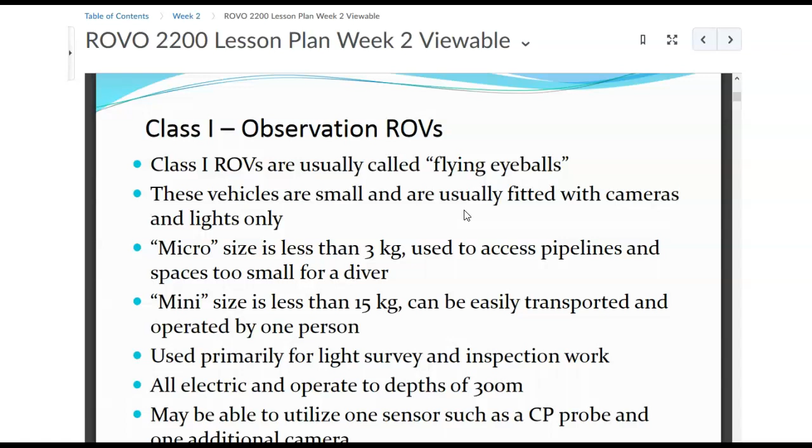Used primarily for light survey and inspection work. All electric and operate to depths of 300 meters. May be able to utilize one sensor such as a CP probe and one additional camera. So cathodic protection, and that's got to do with rust and all that. We'll get into that later on in another course, but feel free to look up cathodic protection.

Okay, and they cost anywhere from 10 to 100. So this is a bit outdated. You can get them now from about $2,000, with Blue ROV and Deep Trekker. So remember those two companies. They're not on the slides.

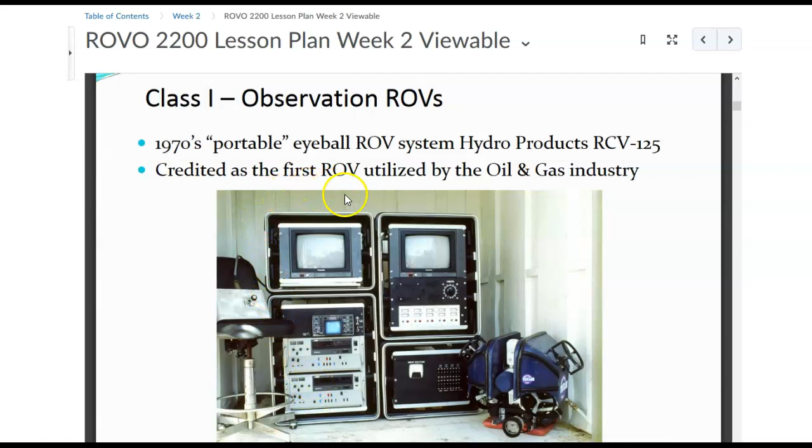So 1970s portable eyeball ROV system, Hydro Products RCV 125 we saw last week. So that's what it looked like. CRT, cathode ray tube television screens, so they're just as deep or deeper than they are wide. Okay. Credited as the first ROV utilized by the oil and gas industry. So there it is again, underneath a drilling platform.

And we'll just get into the naming conventions. ROVs that are manufactured following a standardized design are commonly named by a brand name followed by a number indicating the order of manufacture. Examples would be Millennium 29 or Scorpio 17. Design of a series of ROVs may have changed significantly over the life of an ROV series. However, an ROV pilot will often be familiar with the idiosyncrasies of a particular vehicle by name.

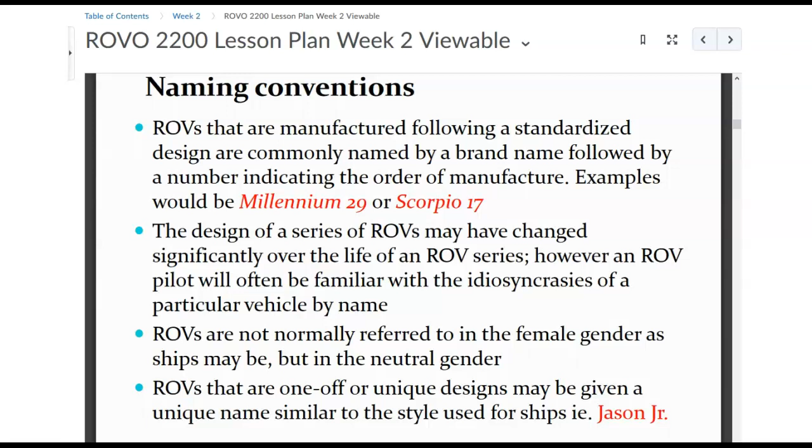So like Mil 29 was different than Mil 3, okay? There were some differences, but they were still Millenniums, basically the same. Mag 25 was different than Mag 33. ROVs are not normally referred to in the female gender as ships may be, but in the neutral gender. ROVs that are one-off or unique designs may be given a unique name similar to the style used for ships, i.e. Jason Jr.

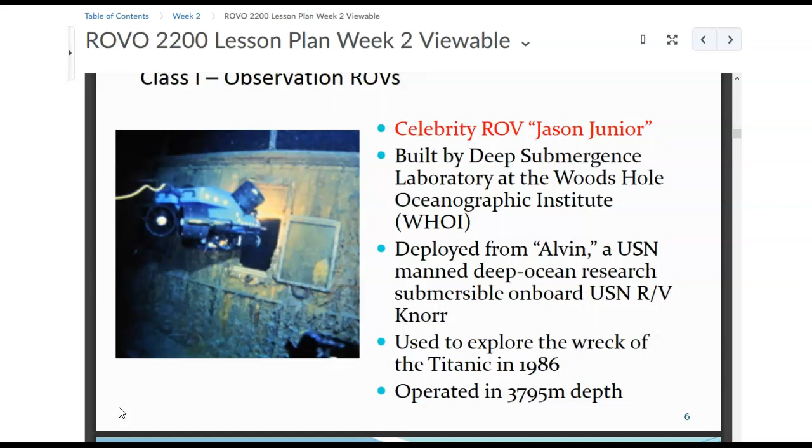Celebrity ROV Jason Jr., built by the Deep Submergence Laboratory at the Woods Hole Oceanographic Institution, WHOI. Deployed from Alvin, a United States Navy manned deep ocean research submersible, on board a United States Navy registered vessel. Used to explore the wreck of the Titanic in 1986 and went down to almost 4 kilometers. Alright, so there are parts of the Titanic, okay?

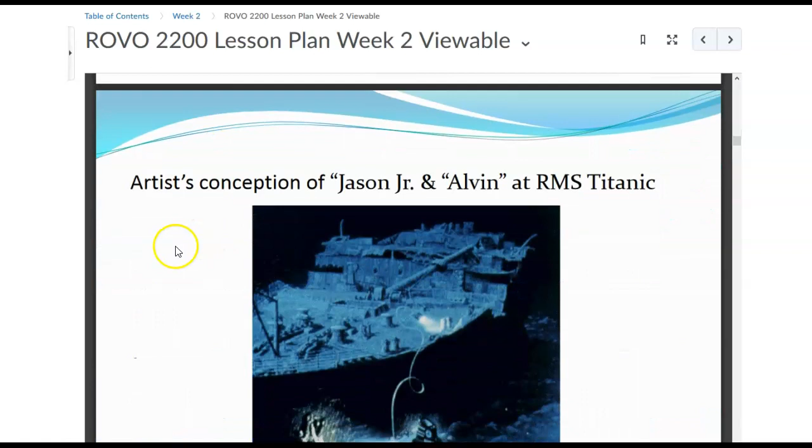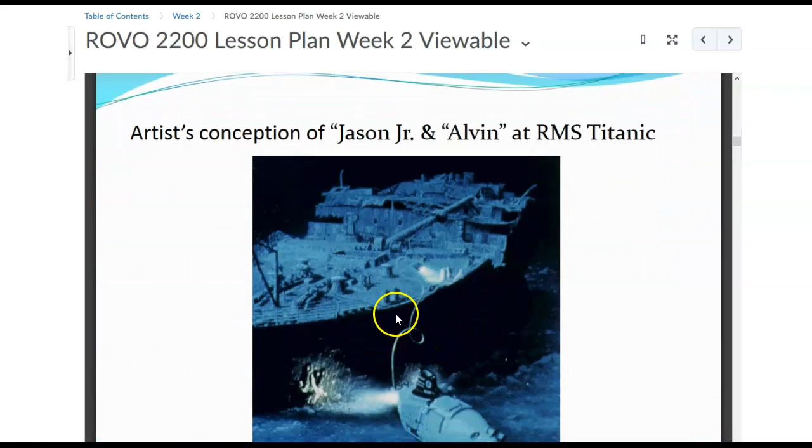And that's an artist's conception. Alright, so you'll see this is the sub and then the Jason Jr. flies out. I think it hit at 30 something miles an hour when it hit the ocean floor. Just to let you know.

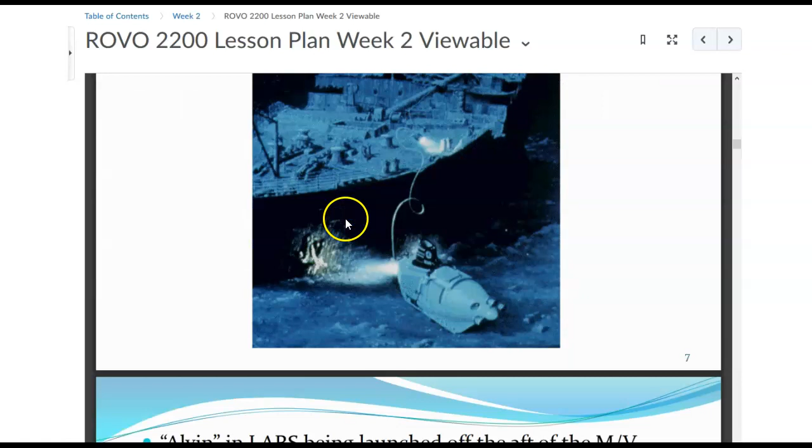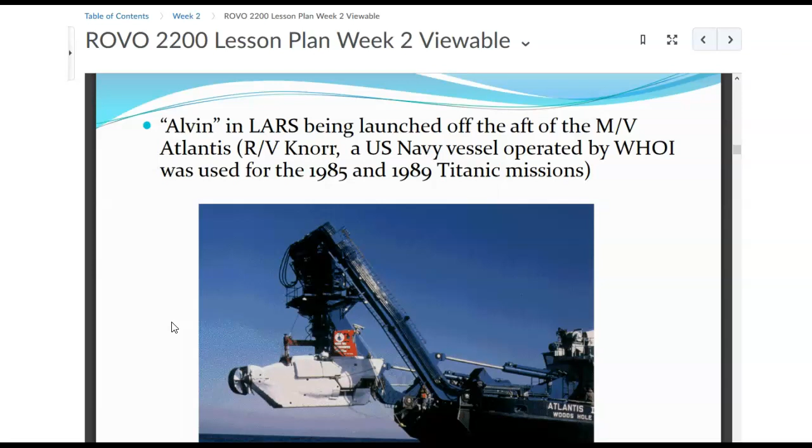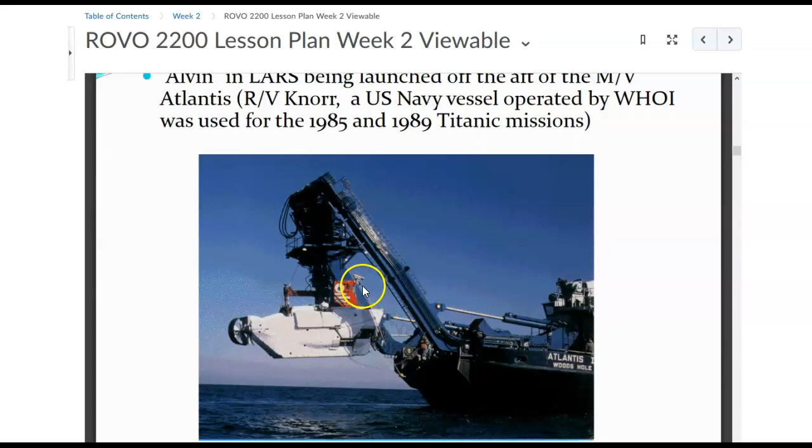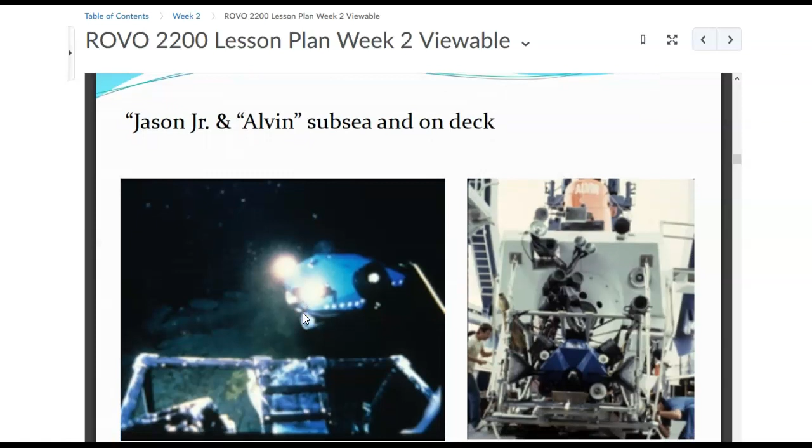Alvin in the LARS being launched off the aft of the marine vessel Atlantis. A United States Navy vessel operated by the WHOI was used for the 1985 and 89 Titanic missions. So once again, there's the LARS, okay, with your giant boom actuators. This swings it in on deck and off, right? Then you release the latches and down it goes. Jason Jr. and Alvin, subsea and on deck.

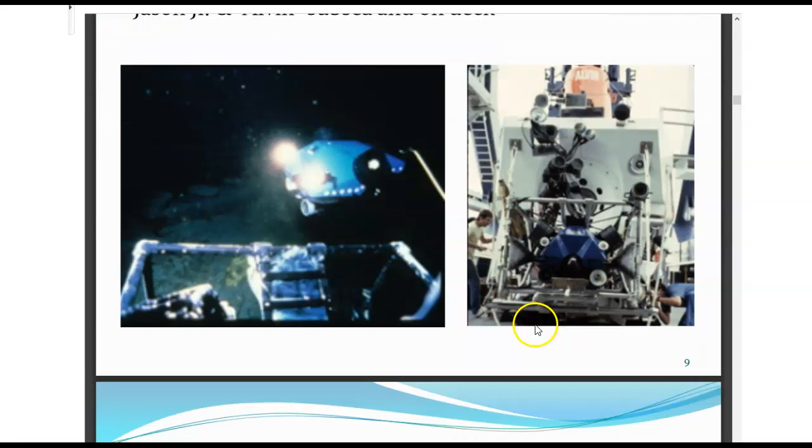Alright, so Class 1 observation ROVs perform simple observation tasks such as monitoring divers and taking video, and perform simple visual survey tasks. Low cost ROV, Quest, low cost LC ROV. Okay. Little manipulator here, right? Lights, camera.

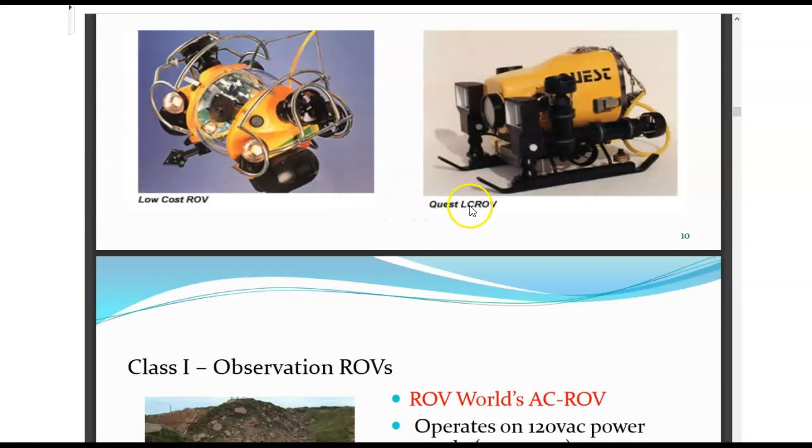ROV World's AC ROV operates on 120 VAC power, 300 watts, 75 meter depth rating, portable, can be deployed by one person in under 3 minutes. Fly-through size of 7.48 inches, and a drop-through size of 8.27 inches, 3 kilograms, 20,000.

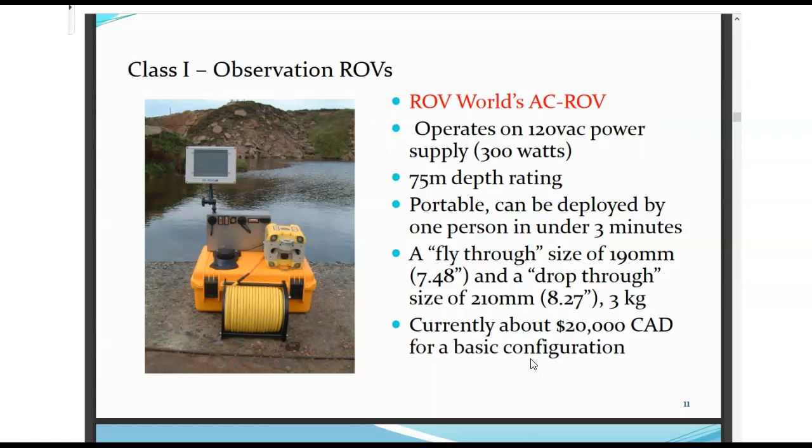Frequently used in conjunction with divers for inspection work. Mainly used for safety purposes to monitor diver location and condition. Gives the surface supervisor an overall view of the subsea work site.

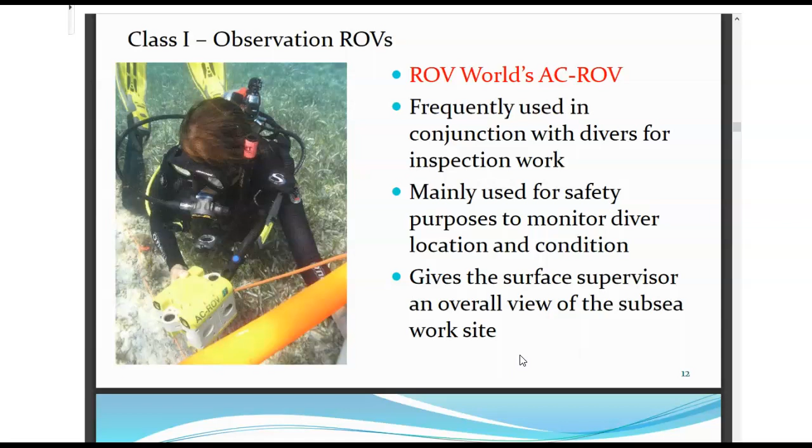VideoRay. We did have one of them. We still got the body of it, and the thrusters work. Manipulator, we got 2 or 3 of them. It's been broken up over the years. It was one of the first ROVs, right? We got a newer VideoRay. It doesn't look like this at all. You can go on the VideoRay website. Shark is another website.

SeaBotix. Deep Trekker is really good. We use a lot of Deep Trekkers. We have 4. And the Deep Trekkers, they got a newer one out with a vertical controller like these ones here. The other models of the Deep Trekker do not use vertical, so it can't go up and down. It can go up and down by changing the ballast.

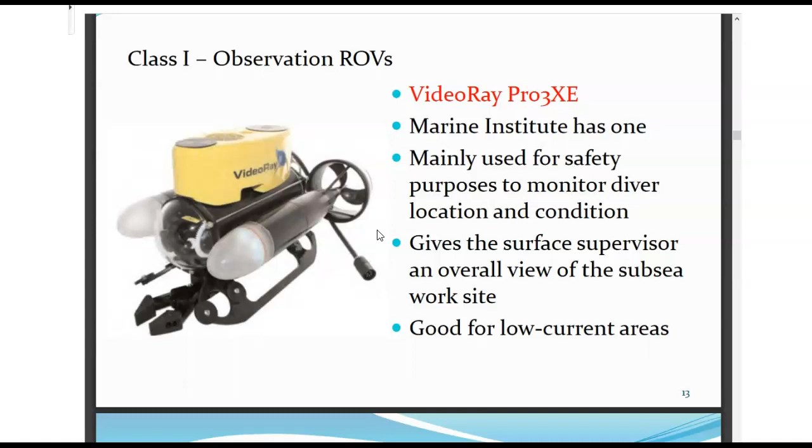Alright, so this here is mainly used for safety purposes to monitor diver location and condition. Gives the surface supervisor an overall view of the subsea work site. Good for low current areas. So SeaBotix, this is the LBV300. We have one of these. Basically, it's down at SeaBotix right now, maybe getting refurbished. Big Green was my pet name on it.

Excellent ROV. There's also an LBV 150. I do believe another division of the Marine Institute has one of them. SeaBotix are used a nice bit. There's a construction company here in Newfoundland that uses them for building wharfs, the inspection of the wharfs and all that. Their main competitor, to me, would probably be Outland. Outland makes an outstanding ROV around the same size.

Okay. 300 meter seawater depth rating, fiber optic or copper conductor video transmission. So the one that the other division got at the Marine Institute has fiber optic. Ours is copper. And the flaw with that was when it came into the rear end, into the connectors, it went wide off, and the fiber optic is only like the size of a human hair, even though it was armored and all that. So you had a Y configuration, which could catch debris, seaweed, sticks, you name it, and then rip it apart. So one dedicated tether is better.

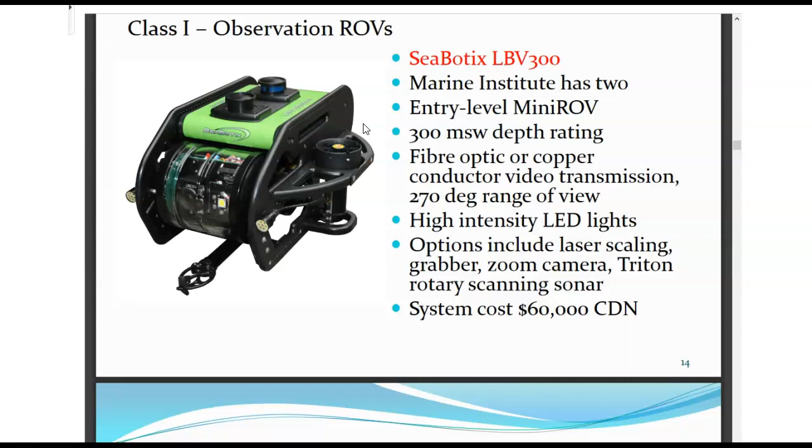All right. So actually, with SeaBotix, their copper, I'm going to say, was better than fiber optic / copper. High intensity LED lights. Options include laser scaling, grabber, zoom camera, Triton rotary scanning sonar. So they cost about 60,000. Same with the Outlanders. The manipulators themselves are anywhere from 4 to 8 grand.

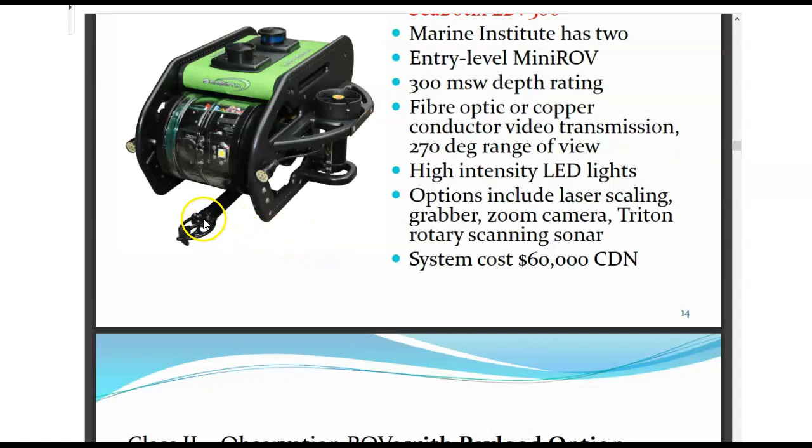Class 2 payloads. Usually have 2 simultaneous view cameras and are capable of handling several sensors. They are capable of carrying additional payloads associated with multiple cameras, sensors, and manipulators without a loss of original function. Can be fitted with sonar and can perform more detailed survey tasks. Can be fitted with light tooling packages such as rope and wire cutters. Higher cost and less portable, usually less than 20 horsepower.

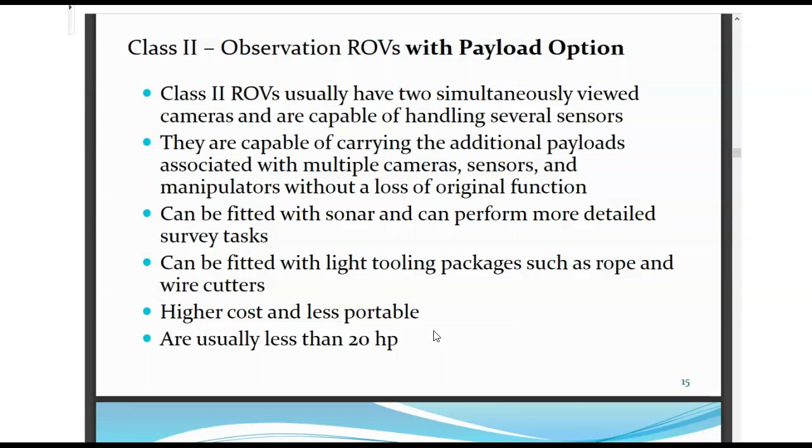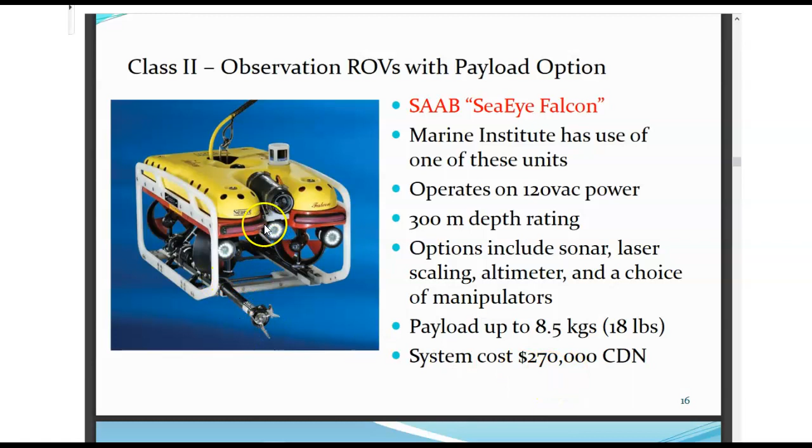So Saab SeaEye Falcon, Saab as in Saab from Sweden, makes the cars and the fighter jets. Marine Institute has use of one of these units; MUN actually owns it. Operates on 120 VAC power, 300 meter depth rating, so 1,000 feet, right? Options include sonar, laser scaling, altimeter, and choice of manipulators. Payload up to 18 pounds, not a heavy payload. The system costs 270,000 Canadian, so very expensive, but a really good sub. I will say I did fly it, really good. Never seen this one before.

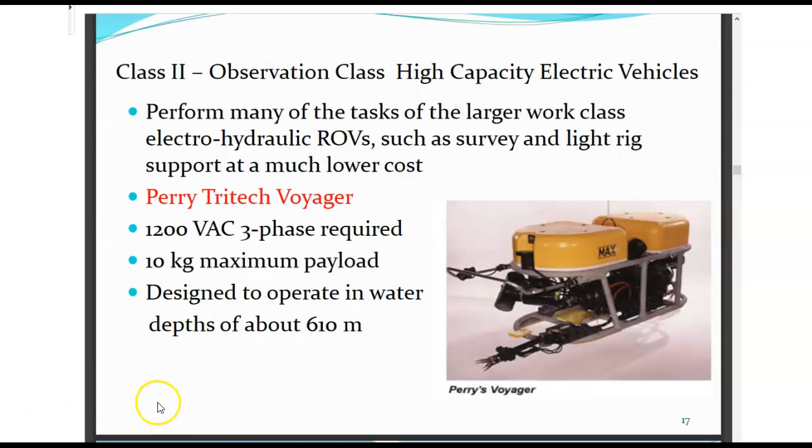Observation class high capacity electric vehicles perform many of the tasks of the larger work class electro-hydraulic ROVs, such as survey and light rig support, at a much lower cost. Perry Tritech Voyager, 1200 VAC 3-phase required, so alternating current, 3-phase. 10 kilogram maximum payload, designed to operate in water depths of about 610 meters. So very capable inspection vehicles that have also gained popularity with the military and science markets. The work scope requirements for military and scientists are not in most cases as complex as oil and gas operations.

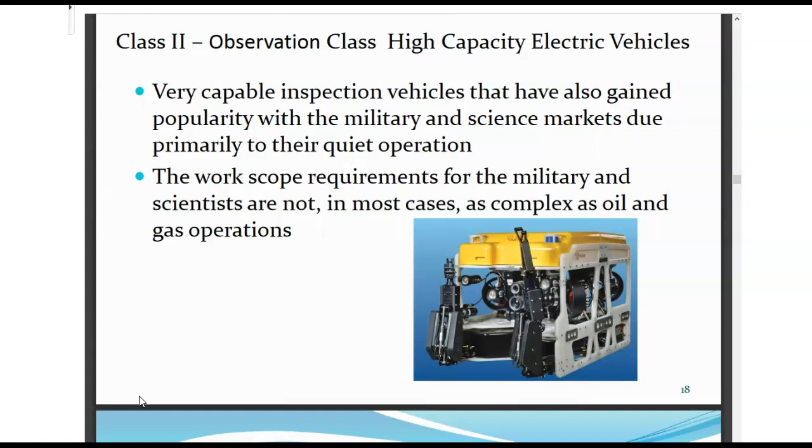So Saab makes a couple of these. Soil Machine Dynamics, SMD, is another one. I guess it's the English equivalent of FMC, Food Machinery Corporation. Work class ROV systems, including vans, LARS, and winch, vary in price from 500 grand to well over 15 million. So I've seen both, okay?

The new Schilling has an ROV, UHD is the name. I think it was $15 million. It's on the Skandi Vinland. It's down there in the harbour by DOF, D-O-F.

There are fewer work-class ROV manufacturing companies than Class 1 and 2 companies. Difficult to know how many companies there are in total due to fluctuating ownership, dissolutions, and niche market constructor/operator companies. So there was ProDive Oceaneering. Now there's ProDive and Oceaneering Canada, owned by Oceaneering from down in the States, worldwide. Dominion Diving's in Nova Scotia. There's Subsea 7, which took over Acergy. Technip is another one, from France. Edison Chouest down in the States. Canyon Diving's a big one. Okay, there's one in Malaysia.

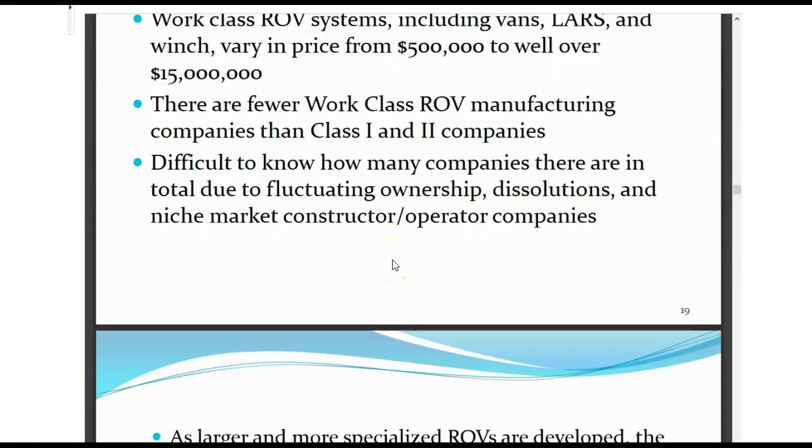It'll come to me. It will come to me. Actually, it's from Italy, the company that owns it, but they got a big contract in Malaysia and Singapore.

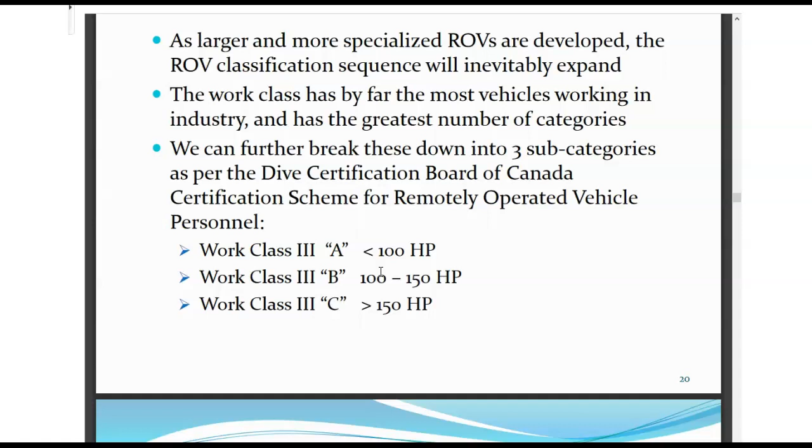So as larger, more specialized ROVs are developed, the ROV classification sequence will inevitably expand. The work class has by far the most vehicles working in the industry and has the greatest number of categories. So we can break these into three subcategories as per the Dive Certification Board of Canada. So less than 100 horsepower is Class 3A, Class 3B is 100 to 150 horsepower, and Class 3C is 150 horsepower up.

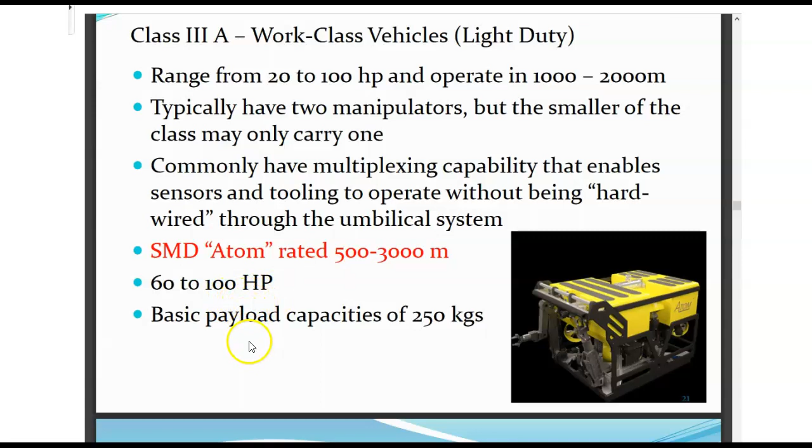Class 3A, so 20 to 100 horsepower, operate 1,000 to 2,000 meters, so 1 to 2 kilometers. Typically have 2 manipulators, but the smaller class may only carry 1. Commonly have multiplexing capability that enables sensors and tooling to operate without being hardwired through the umbilical system. Soil Machine Dynamics, Atom, rated 500 to 3,000 meters, 60 to 100 horsepower, basic payload capacity of 250 kilograms. So a good bit of lift. And that's just an advertisement from the company.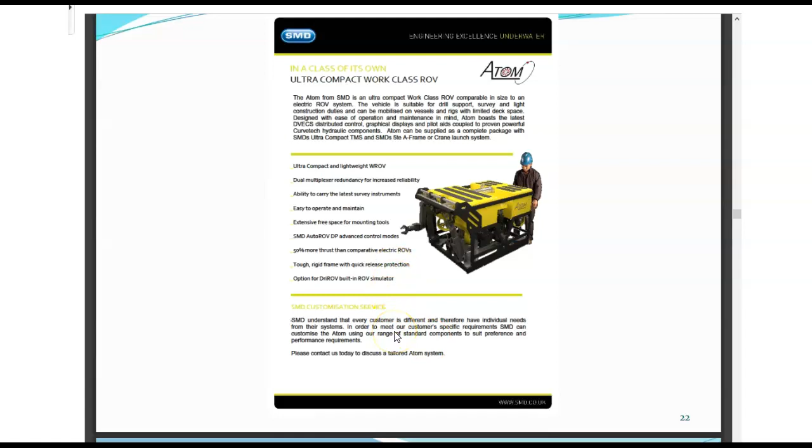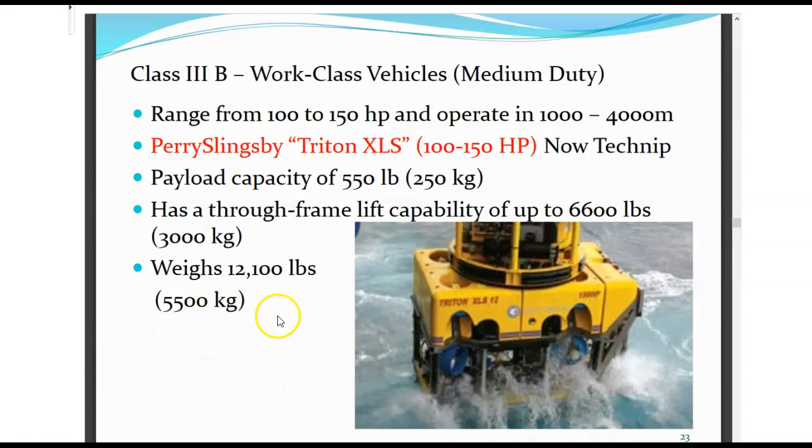So ours is 150 horsepower. This is 100 to 150 horsepower and operates in 1,000 to 4,000 meters, 1 to 4 kilometers. Can lift up to 550 pounds. Through frame lift capability up to 6,600 pounds, weighs 5,500 kilograms, okay? So, nothing light. That's another advertisement.

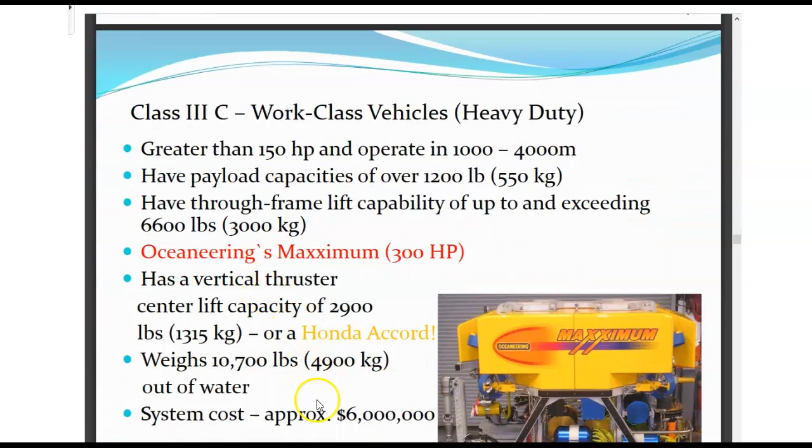So, Oceaneering Maxximum. So I've worked on Millenniums, Millennium Pluses, Magnum Pluses. They're Oceaneering vehicles, so I've never seen this. This is probably encased around, or it could not be, but the main thing is everything is inside the frame, alright? And that's like a fiber optic can, a telemetry can there, that's where your computers are mostly at.

Right, the compensators are here, Firestone bellows, you can see, manipulators, cameras, thrusters, the gold motors are here, okay, looks like there's 2. Termination box, this square one, alright, strain relief. So this came out of a cage because it would have backed in. So the tether is here.

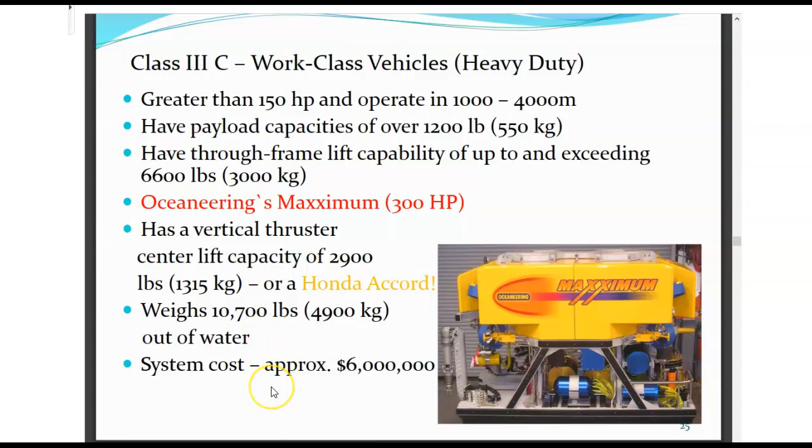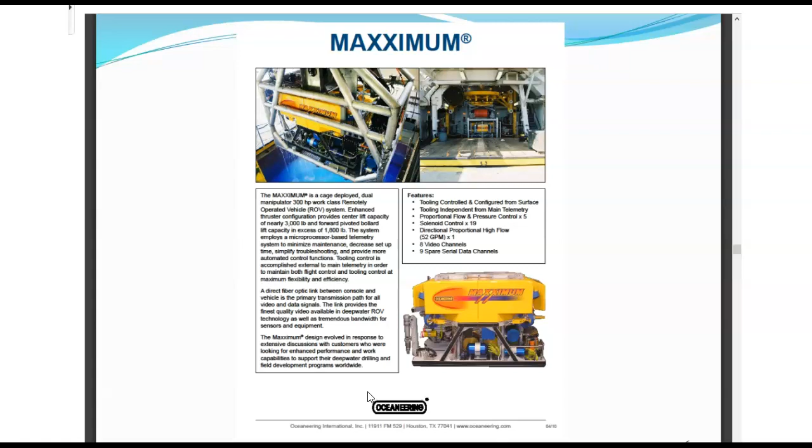Alright, so greater than 150 horsepower and operates up to 1 to 4 kilometers. Can lift over 1,200 pounds, with the capability of exceeding 6,600 pounds. This one here is 300 horsepower, has a vertical thruster, center lift capacity of 2,900 pounds, or a Honda Accord. This weighs over 5 tons, and the system costs $6 million, okay? So once again, there's a data sheet on it.

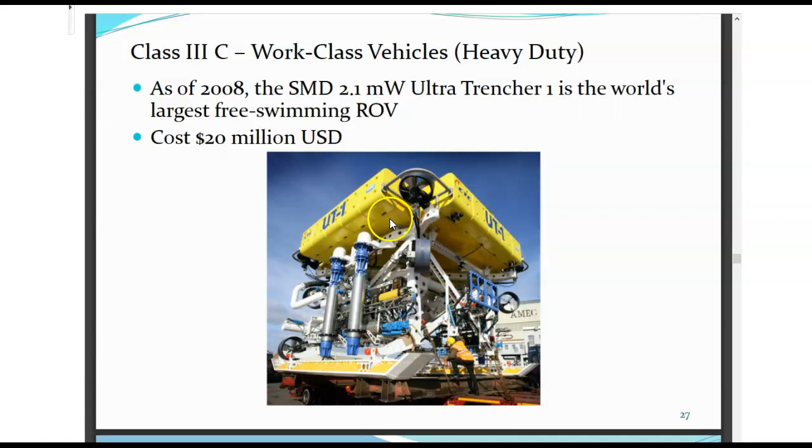So the SMD, Soil Machine Dynamics, 2.1 megawatts, Ultra Trencher 1 is the world's largest free swimming ROV, 20 million US dollars. So you can see the technician, so how big it is. So trenchers inject high pressure water on either side of the pipe, which fluidizes the soil bearing the pipeline. 50 tons, size of a small house, designed to operate down to a depth of 1,500 meters and bury large diameter oil and gas pipelines.

Alright, so we'll just stay here for a second. We'll pause. So here's a little video of a trencher. I'm not going to show it all, but you'll get the gist of it in a second.

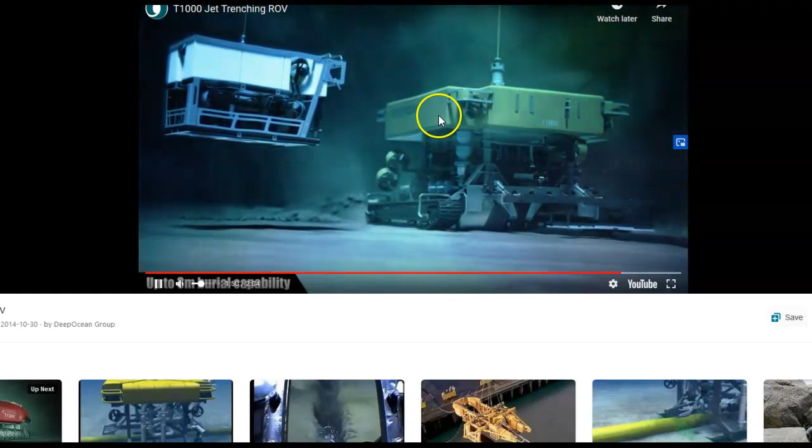As you can see, a regular ROV next to the trencher, making sure everything is going right. This is what you call the God's view, so with the camera on that, you'd actually see this ROV like that, and if there was another ROV looking at the two vehicles, you'd see this scene right here, up on deck. So there you go. Alright.

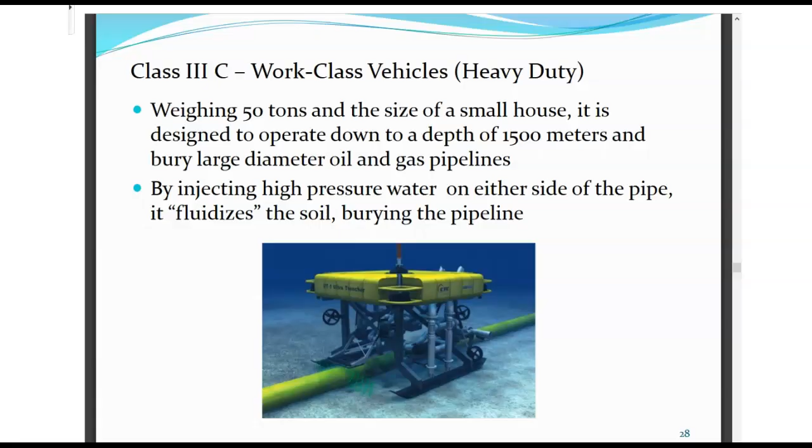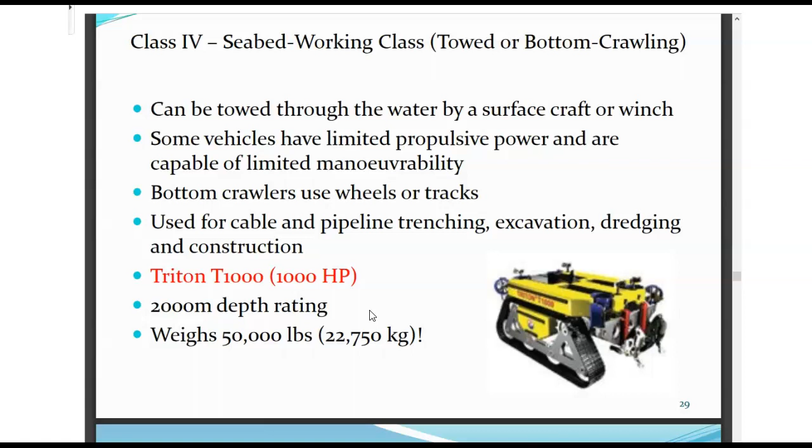So these can be towed through the water by a surface craft or winch. Some vehicles have limited propulsive power and are capable of limited maneuverability. Bottom crawlers that use wheels or tracks. Used for cable and pipeline trenching, excavation, dredging, construction. T1000, 1,000 horsepower, 2 kilometers depth rating, weighs 50,000 pounds.

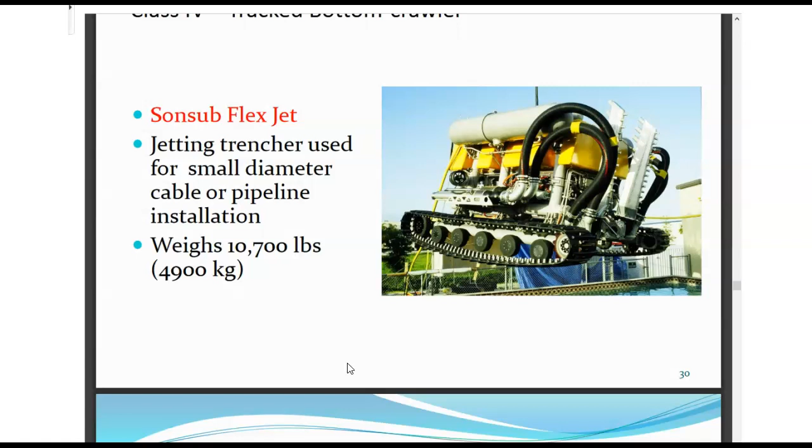Saipem was the company, I'm sorry, from Italy, okay. Big contracts in Asia. Jetting trencher used for small diameter cable or pipeline installation. This weighs 4,900 kilograms. So here, this one here, class 4, tracked bottom crawler again. As you can see, the two people.

2.4 megawatt, 3,220 horsepower. SMD, Soil Machine Dynamics. Rock trencher is currently the world's most powerful seabed tractor, and it still is. The support system for this ROV is massive. You need a $500,000 generator for power. Okay, so with this and the subsea mining, just think of excavators and all that, it's all remote controlled, alright, same size of equipment.

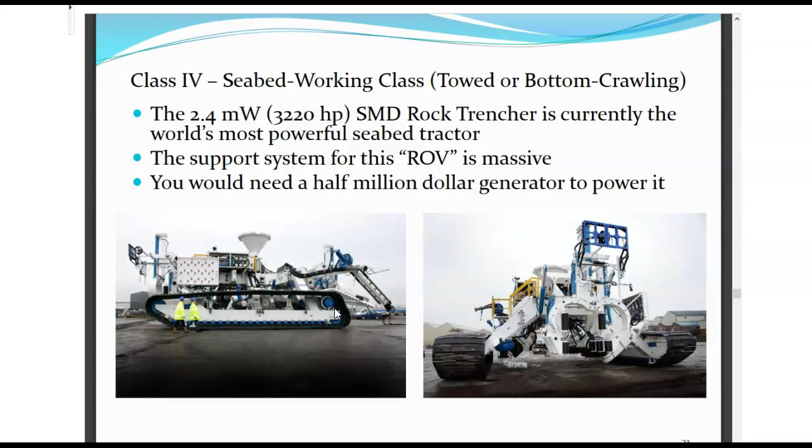Now we've got the AUVs. Most ROVs in this class are classified as AUVs, autonomous underwater vehicles. Autonomous underwater vehicles, AUVs, represent the next step in the evolution of underwater intervention. Three main industries utilize AUVs: oil and gas, scientific research, and the military. AUV applications range from seabed surveying to ocean research and mine countermeasures work.

The oil and gas industry currently utilizes AUVs for making detailed maps of the seafloor before they start building subsea infrastructure. Pipelines and subsea completions can be installed in the most cost-effective manner with minimum disruption to the environment. Also, post-lay pipe surveys are now possible.

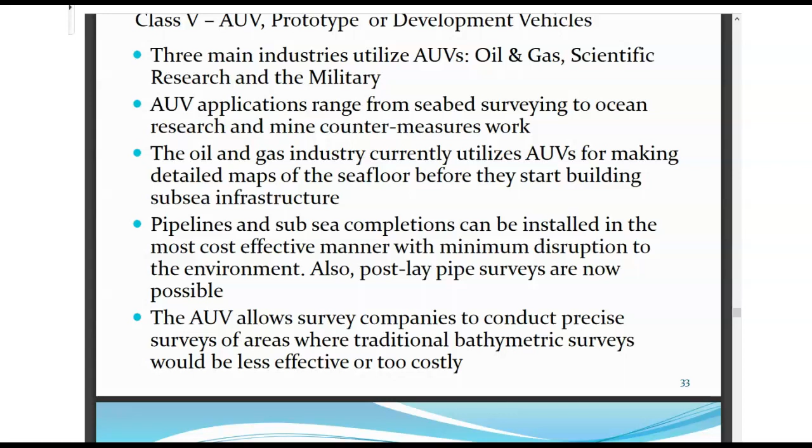The AUV allows survey companies to conduct precise surveys of areas where traditional bathymetric surveys would be less effective or too costly. So I'll just get a little blurb up on AUVs for you. Bear with me. So this is from Fugro, another company that's got ROVs too. So I'll just show you the sonar image.

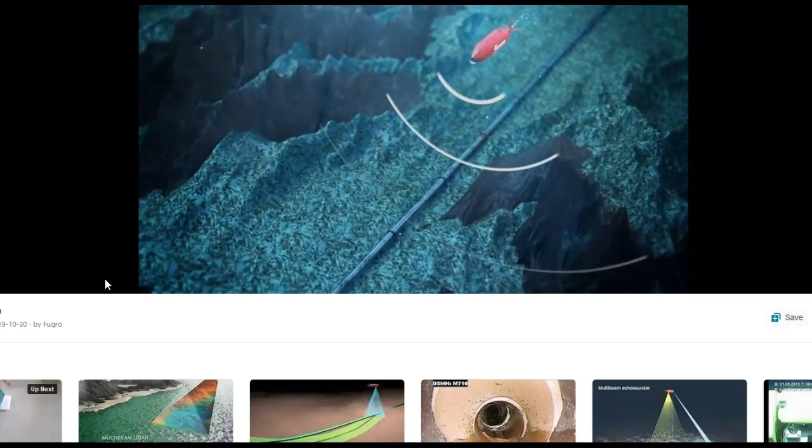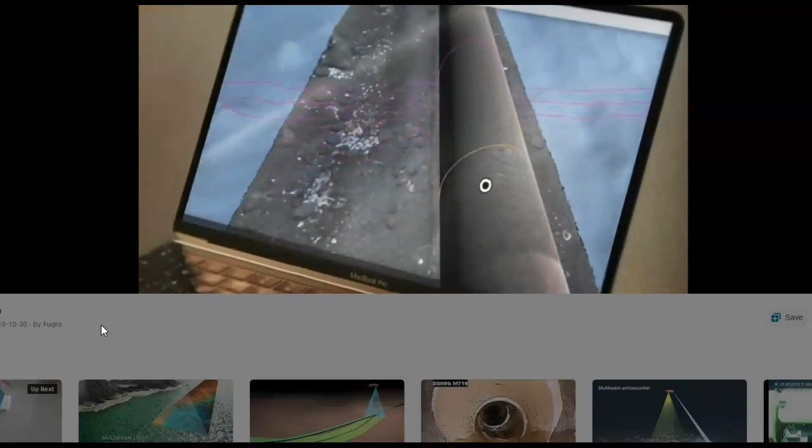Fugro, a world leader in subsea inspection services, has created an innovative pipeline inspection solution, providing quick, efficient and cost-effective information on pipeline assets. Using our fleet of autonomous underwater vehicles, or AUVs, we optimize data collection and delivery, enabling asset insights within hours. Pipeline information is delivered remotely via a web-based environment in the form of a digital twin. This photorealistic 3D model provides detailed intelligence on the pipeline's condition and an overview of any anomalies. The automated workflow makes the data processing up to 80% more efficient, allowing faster access to critical information. Fugro's solution allows remote data access to our specialists, reducing HSSE exposure.

So as you can see, some AUVs are fairly big.

Personnel needed offshore. AUVs can be mobilized from a container on a vessel of opportunity, increasing flexibility and reducing operational costs, enabling our clients to make timely asset management decisions. Fugro, unlocking insights from geodata.

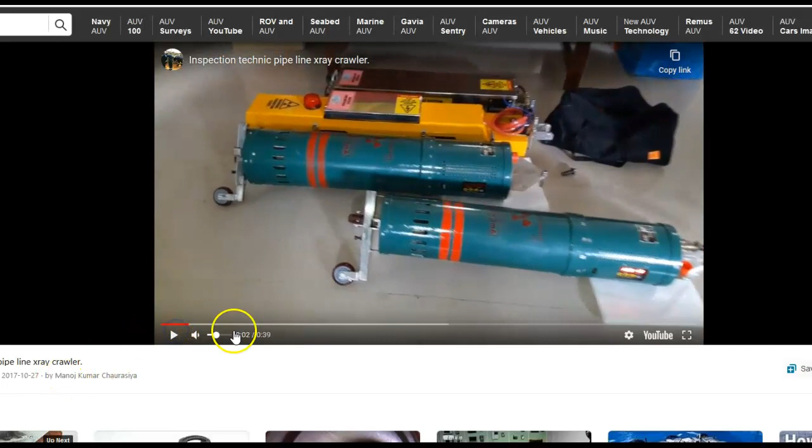Alright, so that's enough. We'll show you Aquanaut. This is a hybrid. We'll get into hybrids later.

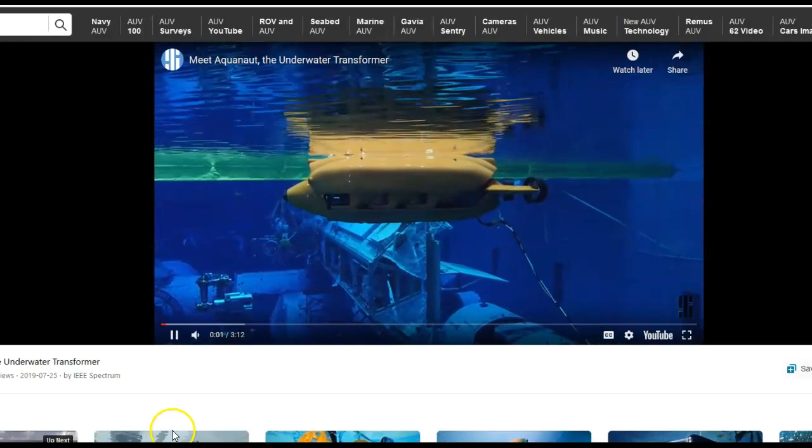We came up with this concept from the get-go to build a transforming vehicle so that we could be hydrodynamic and be able to cruise a long distance. And then so just remember that, Aquanaut, the underwater transformer.

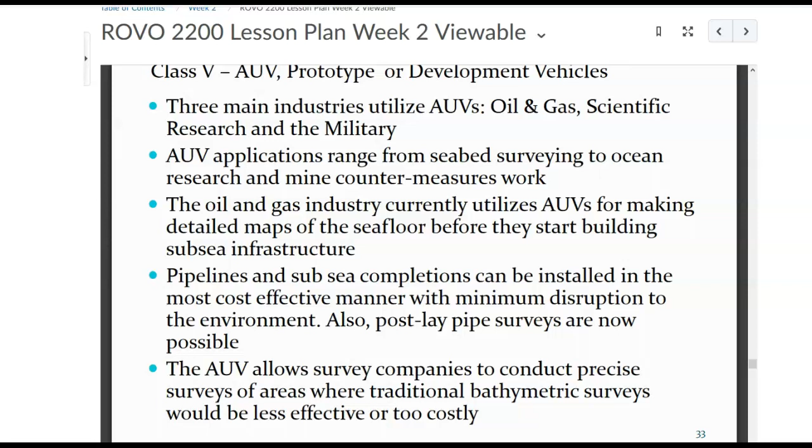Okay. And we'll stop that. That's all. You can look at that yourselves. And back to the lesson plan. So the AUV flies, right? Scanning here, scanning here.

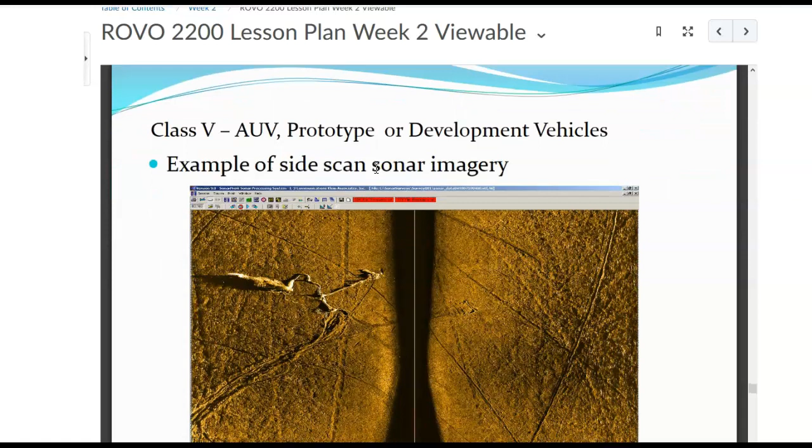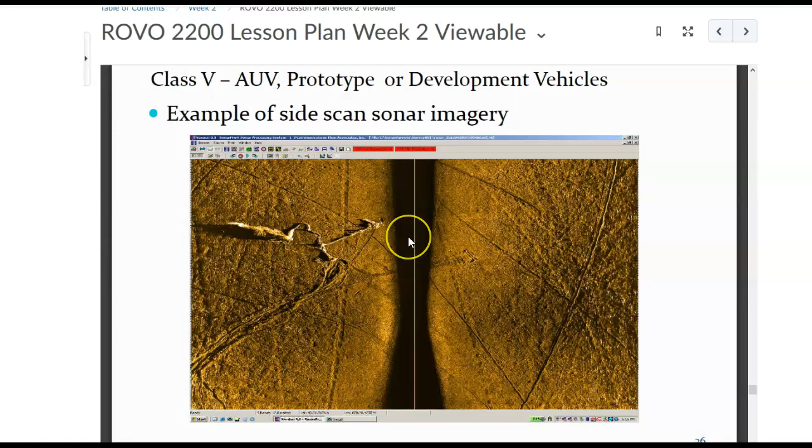What I'll just say about this computer software is it was the same I was using 10, 12 years ago with Baker Hughes. Alright? But that's for the ocean mappers to interpret. But obviously it's the seabed floor, right? And this blank space is right underneath the ROV, the side scan sonar image. So there is a blank space.

Right. AUVs are primarily oceanographic tools. They carry various sensors that enable them to navigate autonomously and map features of the ocean. Typical sensors include compasses, depth sensors, side scan, other sonars, magnetometers, thermistors, Doppler velocity sonar, and conductivity probes. Most AUVs in use today are powered by rechargeable batteries, along with a sophisticated battery management system, ultra capacitors, right? So we got all this now to go through. So we'll get back to that.

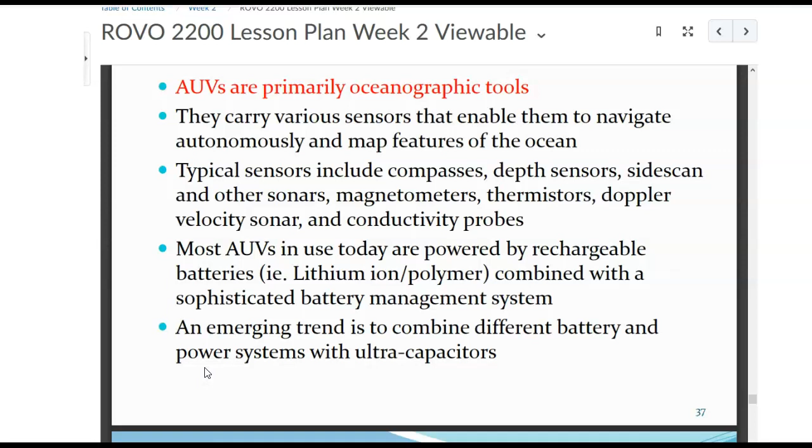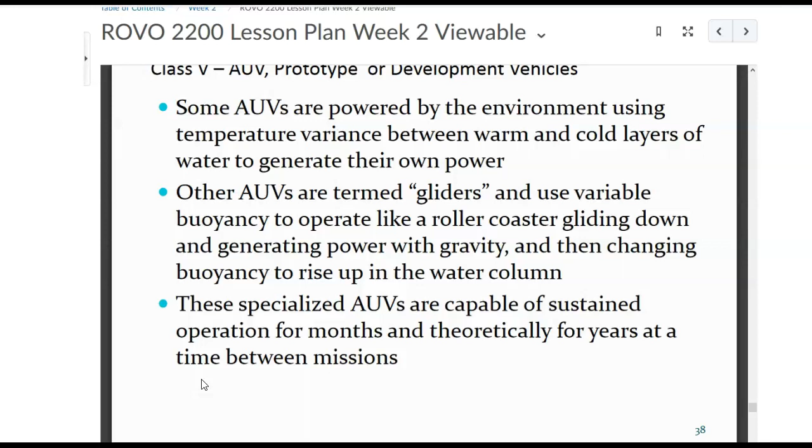Some AUVs are powered by the environment, using temperature variance between warm and cold layers of water to generate their own power. Other AUVs are termed gliders and use variable buoyancy that operate like a roller coaster, gliding down and generating power with gravity, then changing buoyancy to rise up in the water column. So just think of an AC sine wave, anyone with an electrical background. These specialized AUVs are capable of sustained operation for months and theoretically for years at a time between missions.

So, everyone knows what a compass is. Depth sensor, just a transducer, right? The pressure squeezes, producing the voltage. The higher voltage, the more depth, I do believe, from what I can remember. Side scan, other sonars, you've seen just a bit of that. That's for another course and other instructors, including myself. Magnetometers, magnets, right?

Compasses and thermistors, for temperature sensors and all that. Doppler velocity sonar, conductivity probes. It's for electrolysis, cathodic protection and all that. Doppler velocity logs, DVL, a sonar system that measures motion underwater. It emits sound bursts along beams angled downward in various directions. Echoes that are scattered off the seabed are returned. Okay.

So an ultracapacitor is a supercapacitor. It's an electrical component capable of holding hundreds of times more electrical charge quantity than a standard capacitor. So use will require very little current and low voltage.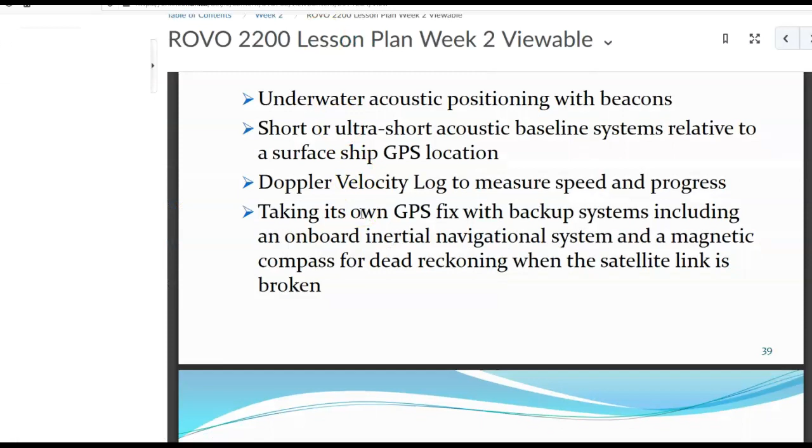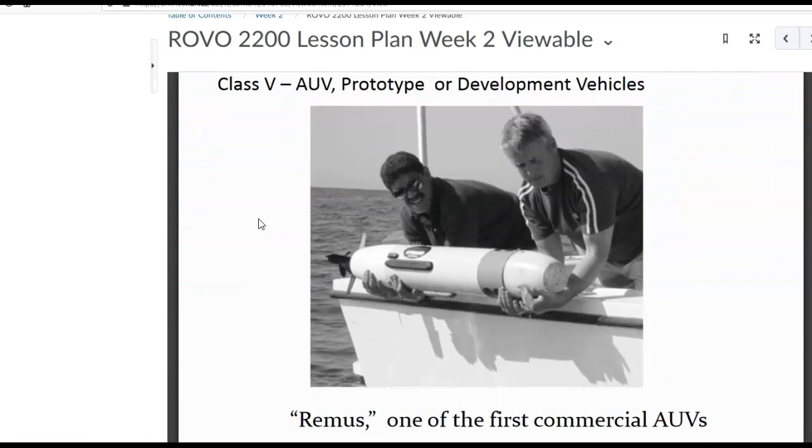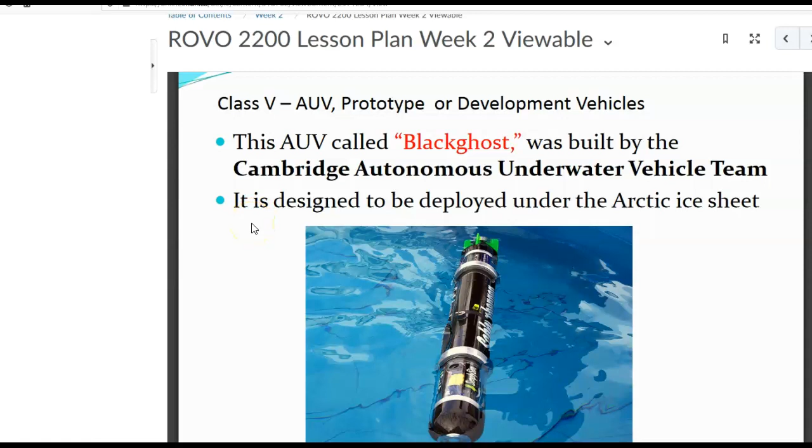The hybrid ROV Nereus will transform from a free-swimming vehicle for wide area ocean surveys to a vehicle tethered by a cable to a surface ship for close-up investigation and sampling of seafloor rocks and organisms. Nereus was developed by the Woods Hole Oceanographic Institution.

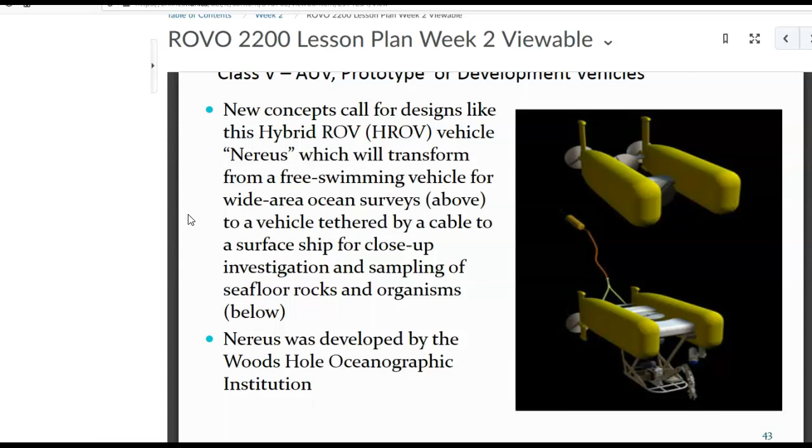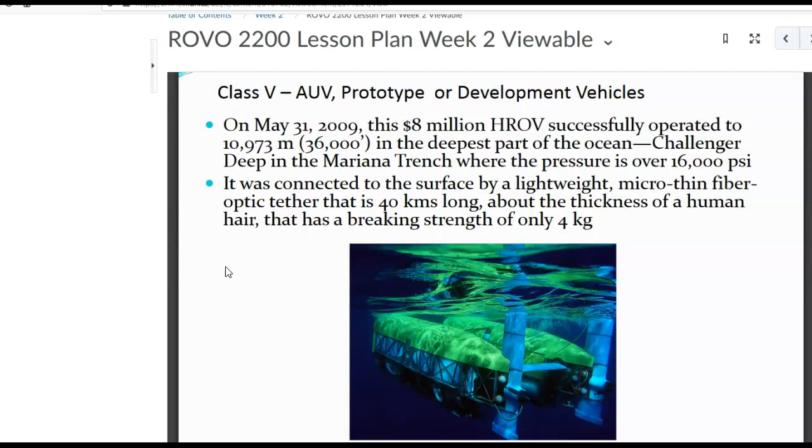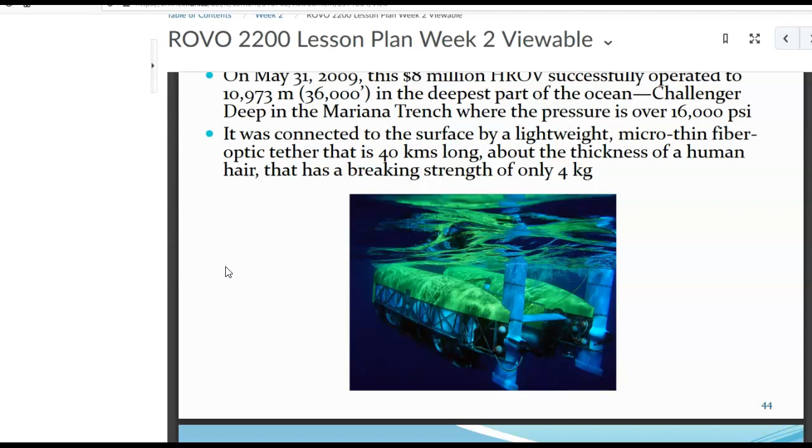So this is $8 million, right? So they operate to 36,000 feet, almost 11 kilometers, in the deepest part of the ocean. Challenger Deep in the Mariana Trench, Pacific Ocean, where the pressure is over 16,000 psi, pounds per square inch. It's connected to the surface by a lightweight micro-thin fiber optic tether, 40 kilometers long, about the thickness of human hair, that has a breaking strength of only 4 kilograms. Hard to believe, but it did happen.

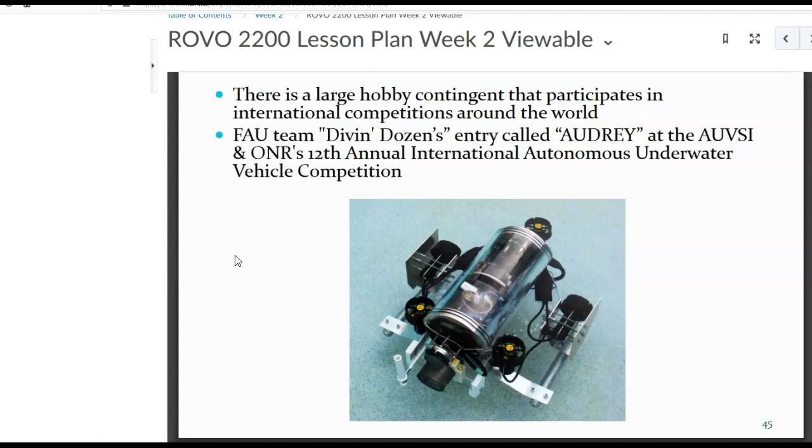So the hobby contingent, right, there's lots of competitions on the go, okay? MATE is one, probably the main one. And Marine Institute helps support a team, and they've won, I think, 3 times worldwide. So I'm not going to get much into this, alright? But it's growing.

Subsea exploration is still on the go, right? Fugro is always hiring, and the companies... I'll just pause this again.

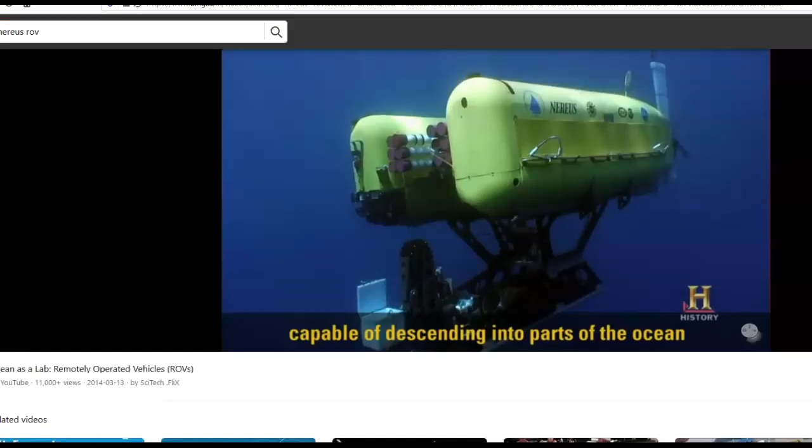Descending into parts of the ocean that have previously been unexplored, and I think it's fair to say that will result in new discoveries about our ocean environment. Our final trials for the Nereus vehicle were, of course, to take it into the deepest part of the ocean, the bottom of the Marianas Trench in the Western Pacific. You could put Mount Everest into the Marianas Trench and there'd still be a mile of water over the top of Mount Everest.

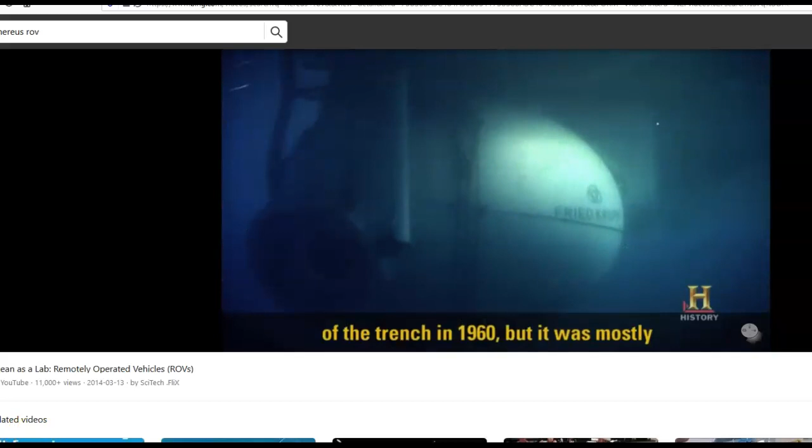Humans have been to the very bottom of the trench. But it was mostly a technological demonstration of its day. Likewise, Japan developed a vehicle in the 1990s called Kaiko. Its maneuverability was limited in terms of trying to understand such an unusual environment. The trip to the seafloor takes about 8 hours. As the vehicle is descending, of course, the pressure is building up. So will the structure hold up?

Nereus ROV, just put that in on YouTube, History Network. It's pretty interesting, actually. And as we got closer and closer to the seafloor, of course, we became more and more excited. Right, so that's it.

So, like I say, from my knowledge, the fish farming net cleaning has picked up big time. The small ROV work has picked up considerably in the last 5 years, and the amount of companies, like Blue ROV, Deep Trekker. There's a company in PEI, Prince Edward Island, that makes 3 nice models. You can make one yourself, basically, for several hundred dollars to $1,500. So smaller is better. Is that how it's going this day and age?